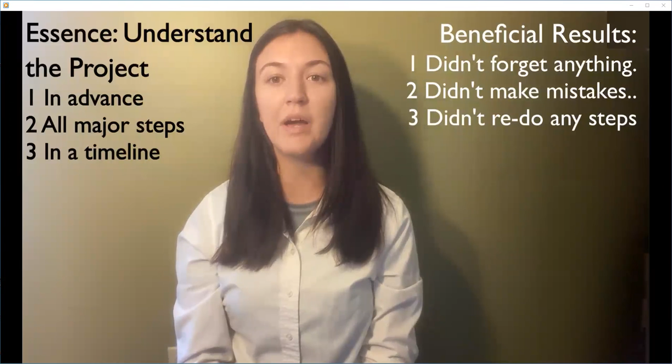The essence of project management is to clearly identify all that is required in the finished machine casting, understand it, and put all the major steps in a timeline. The idea is to think of everything that matters in advance and not forget anything. The objective is to not back up to fix mistakes or redo steps. For complex, high-specification DLA legacy castings, not fixing mistakes and not backing up to redo steps is a tough challenge.

Now, in this part 4, we will address the project management forethought required to finish the as-cast surfaces of a DLA legacy casting made in either the air-set sand or investment casting processes. Finish those as-cast surfaces so that the dimensional capability is protected, surface finish is protected, and solidification integrity is assured.

Now, notice that I emphasized the finishing of as-cast surfaces. It is one thing to form functionally, structurally, and dimensionally capable as-cast surfaces in the molding and pouring shop, but it is another to protect and sustain those as-cast surfaces in the finishing department. It is from those as-cast surfaces that the finished machine surfaces are formed in the correct positions and planes to meet the machined tolerance requirements.

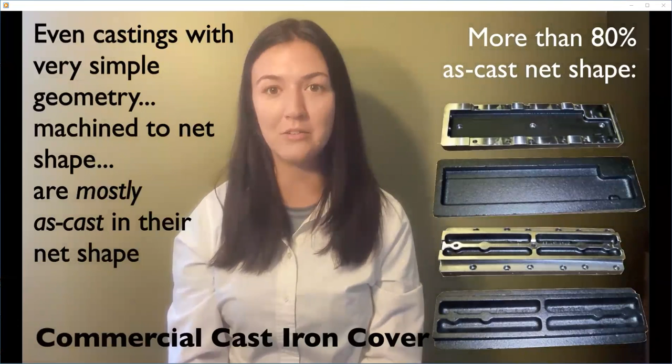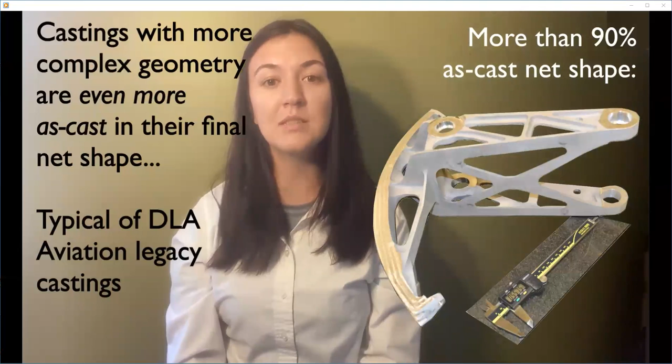The significance of as-cast surfaces can be put in perspective with these underappreciated insights about finished machined castings. Castings with very simple as-cast geometry machined to more complex net shape are still 80% or more as-cast in their final net shape. Castings with more complex as-cast geometry, as are typical DLA legacy castings, are 90%, 95%, and sometimes even more as-cast in their final net shape.

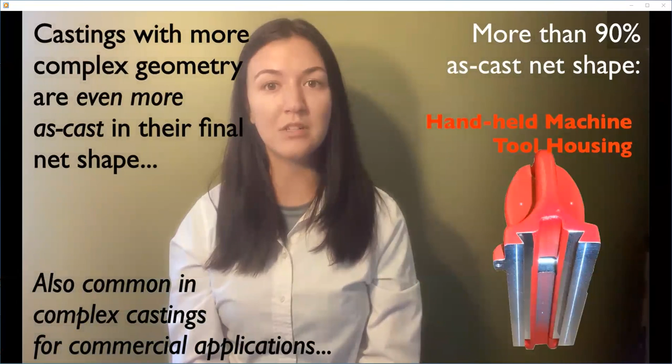Those high percentages of as-cast geometry mean that the as-cast features are important in the casting designs functionally, structurally, for stress control and component durability, and sometimes assembly with other components, using just the as-cast surface or surfaces. A common example of the latter is as-cast fastener holes and smooth, acceptably flat as-cast bolt-up surfaces.

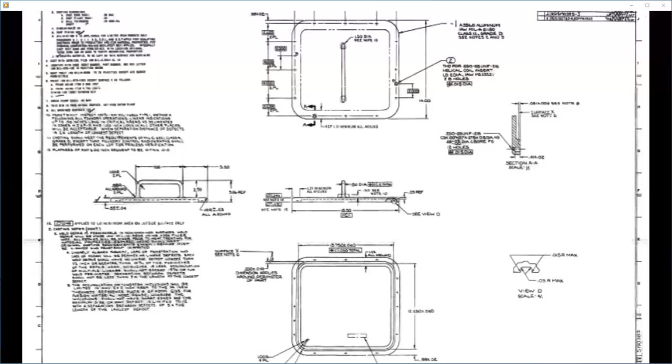Especially important to machine shops are the as-cast surfaces that are used for setup in the first machining fixture, and sometimes part of the setup targets for a second machining fixture. Those as-cast setup features should be datums in the design of the casting, and those features should have datum targets defined on them. For legacy casting 2D drawings, those datum targets are probably not defined, and the metal caster and machine shop must define those targets in advance before anything starts.

Foremost, this part 4 summarizes why, how, and when as-cast surfaces should be protected in their original dimensional capability from the design of the mold cavity and its processes, and their conformance to the drawing's dimensional specifications.

While protection of as-cast dimensional capability and conformance with tolerances is paramount, the next most important function of casting finishing is verifying, and sometimes upgrading by in-process weld rework, solidification integrity. Solidification integrity in castings is the basis of mechanical properties and casting durability in cyclic life.

Fundamental to achieving mechanical properties in heat-treatable alloys is the equipment and process controls for controlled heating, controlled time at temperature, and controlled cooling of the casting to accomplish the specified mechanical properties. Whether heat-treated in-house or by an outside heat-treating partner, it is a process that is well understood and robust.

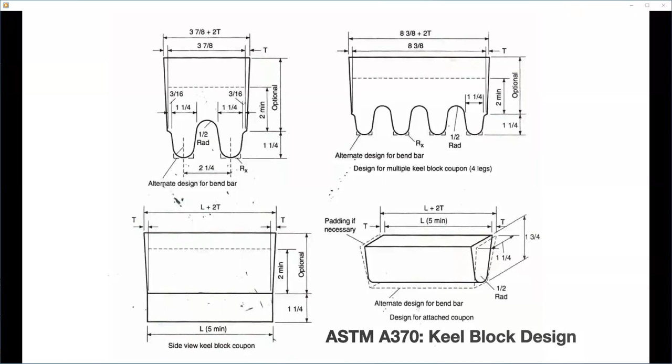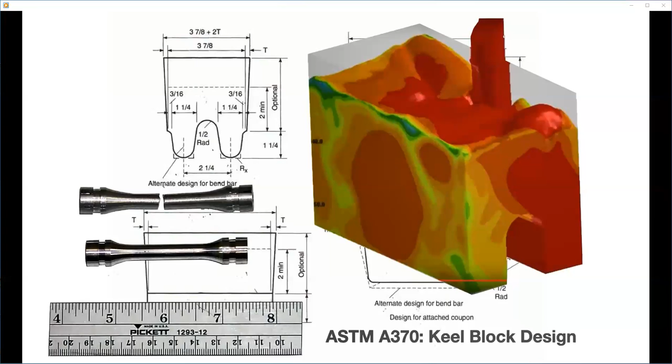Since verification of heat-treated properties is usually accomplished with test coupons that are as-cast separately by one method or another, the properties from tensile tests, impact tests, and bend tests, for example, are representative of the alloy's capability, not necessarily a local high-stress region in the actual castings.

In this Part 4 overview of project management of casting finishing processes, we address testing for solidification integrity of high specification castings, both on their surface and in their interior. If a local region of a casting is critical structurally, the design will include specifications for non-destructive testing by surface methods and/or radiography. If the solidification integrity meets those NDT specifications, then the results of heat treatment and mechanical testing of coupons will assure the casting has the strength and durability intended in its design.

Today's concluding episode explains all this thoughtful project management thinking at the outset, before any finishing processes just start. To characterize the finishing of as-cast surfaces in either the air-set sand or investment casting processes will be our Cast It teammate Mike Gwynn. Mike is our expert on casting design and manufacturing engineering, with a background in manufacturing operations management, which includes project management.

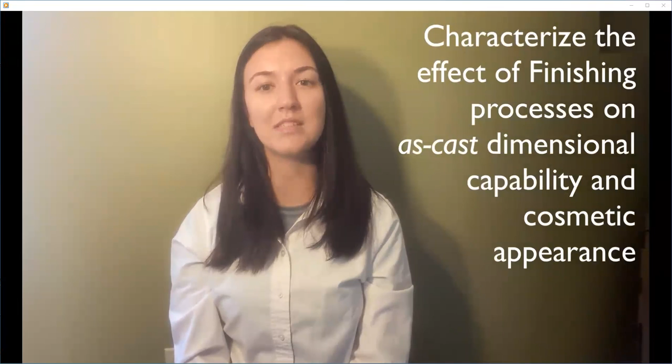We suspect that project management forethought of the finishing of as-cast surfaces, even before mold cavity tooling is designed and built, even before manufacturing engineering of the mold making process, is a fresh idea. After Mike's focus on the forethought required to assure the finishing processes protect the casting's as-cast dimensional capability, I'll return to address the roles that finishing plays in assuring the casting meets its solidification integrity requirements. Now, here's Mike to characterize the effect of finishing processes on dimensional capability and cosmetic appearance of as-cast surfaces, and how to use care in those processes to protect them.

Thanks, Julia, for that insightful first segment on the finishing of castings in general, and specifically the finishing of castings made in the air-set sand and investment casting processes. Building on the whys of casting finishing that Julia introduced, let's now address when the protection of as-cast surfaces begins and then how to do so.

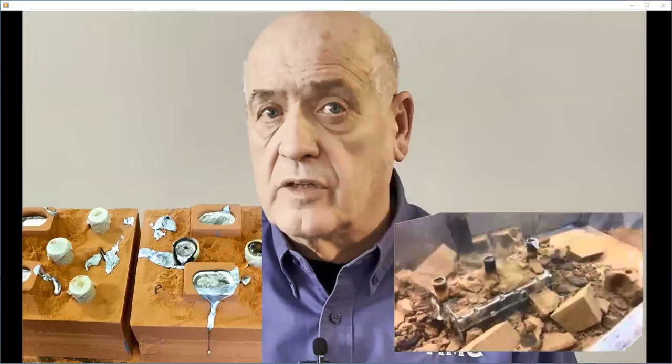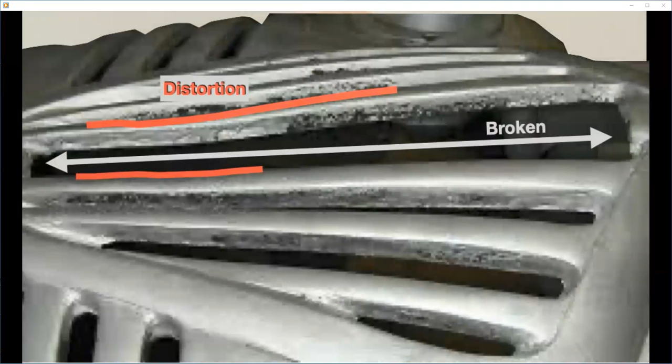Perhaps surprisingly, finishing begins when the casting is still in the mold cooling. At this point, the foundry and pouring teams are less interested in the casting and more interested in moving the molds to shakeout in the case of air-set sand castings, or to ceramic shell removal in the case of investment castings. However, removing the casting from its mold too quickly risks distortion of the thin walls and delicate projected casting features. Such distortion will immediately violate as-cast dimensional tolerances, and the idea of protecting the as-cast surfaces has already been compromised. The consequence of accidental casting distortion from removing the casting from the mold too soon, while it's too hot and too soft, depends on the alloy.

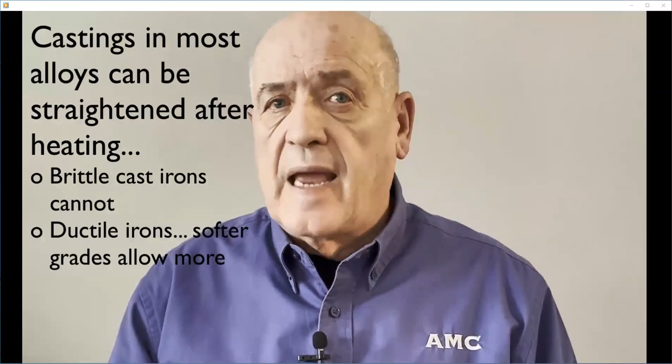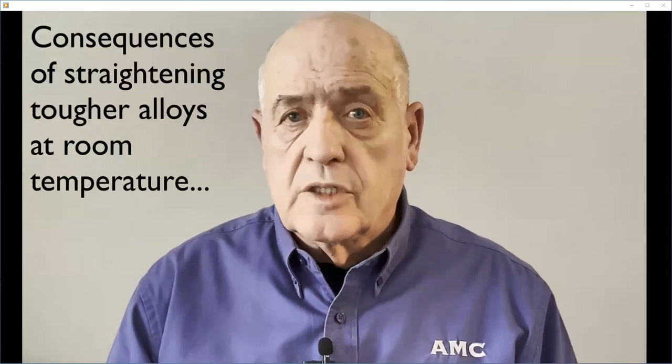Most casting alloys can be straightened, although brittle cast irons cannot, even if heated to high temperature. Ductile irons can be straightened in varying degrees depending on the strength grade; softer grades can be straightened more than harder ones. Some alloys, especially steels, can be straightened at room temperature without causing a crack. However, doing so means the metal is being plastically deformed in local spots to enable movement of an entire bent or twisted feature. Plastic deformation shortens the cyclic life of a metal component.

Perhaps the casting only has a static structural purpose, or no structural purpose at all, but the finishing folks probably have no idea about any of that. It's proper practice to heat the casting to an appropriate temperature, depending on the alloy, to prevent plastic deformation while straightening. That way the casting's structural life, if that's important, won't be compromised.

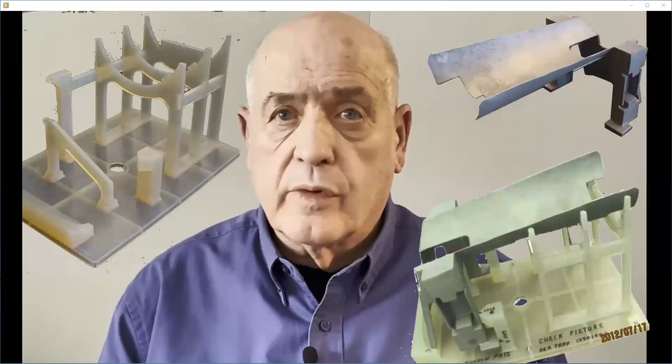Here we see a high specification, very complex, high alloy steel casting being checked for straightness in a quick 3D printed, durable nylon dimensional checking fixture. Usually castings are straightened by a skilled operator with a press, a torch, and manual straightening blocks of various shapes. The checking fixture is used over and over to verify the progress of the straightening increments.

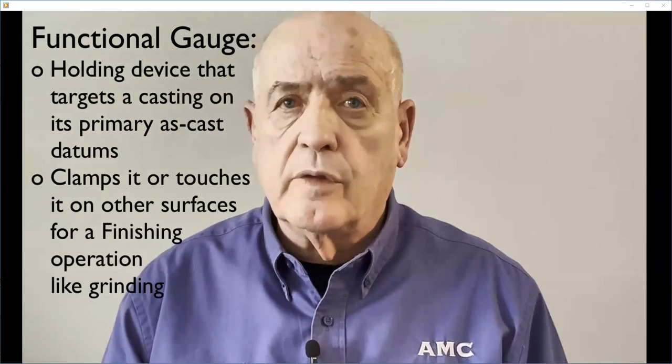A very effective tool for protecting the as-cast features most important for casting machining setup and as-cast features used in final assembly is a functional gauge. A functional gauge is a finishing process holding device that targets a casting on its primary datums and clamps or touches it on other surfaces important to the first machining fixture and/or as-cast final assembly features.

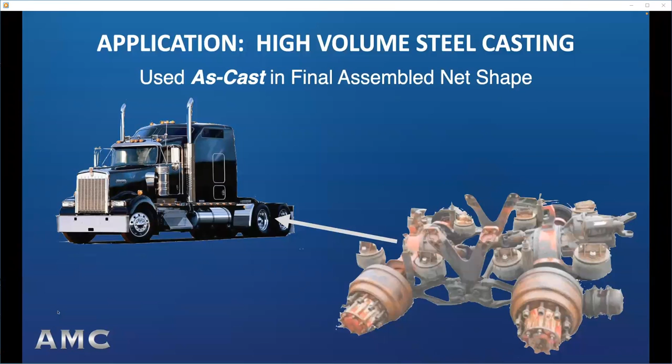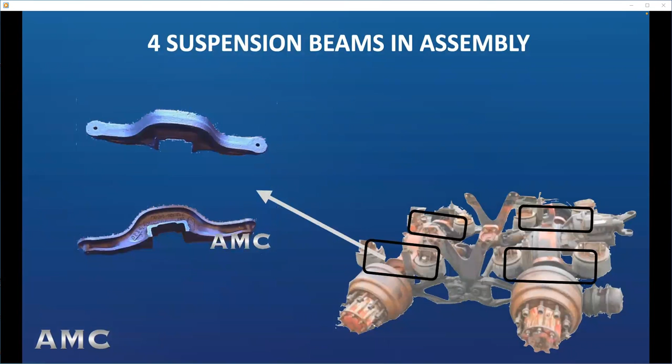Every casting passes through the functional gauge in its finishing process step; therefore, it's 100% dimensionally verified. Here's an example of 3 functional gauges used in assuring dimensional compliance of a steel casting used in the rear suspension of an 18-wheeler tractor. The casting is used as cast, with no machined surfaces, in its final assembled net shape. Shown are 2 views of the green sand casting, 4 of which are used in the suspension supporting airbags. Accurately placed and accurate cores form the assembly surfaces in the suspension.

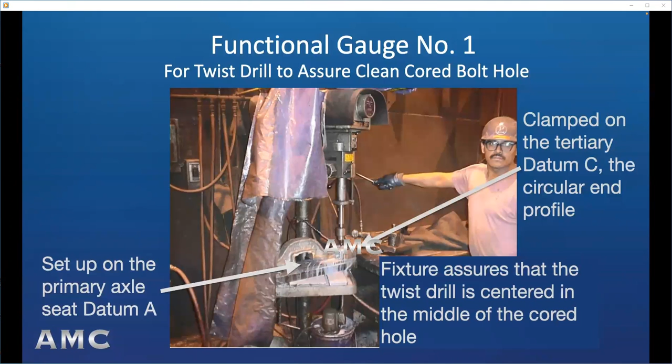This is the first of 3 functional gauges. This one sets up the casting on the primary datum A, which is the axle seat. The casting is clamped against the tertiary datum C, which is the circular profile of the airbag seat. The functional purpose of the fixture is to assure that a twist drill passing through the cored as-cast bolt hole is centered, only assuring there is no plus metal on the inside of the cored hole, but not actually drilling an elongated shape in the hole.

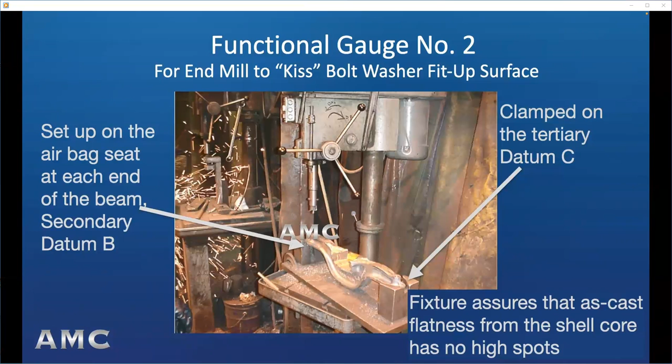The casting rests upside down on the second functional gauge, set up on the secondary datum B, the face of the airbag seat on each end of the casting. A simple piloted end mill kisses the face of the surface on which the airbag's bolt washer sits.

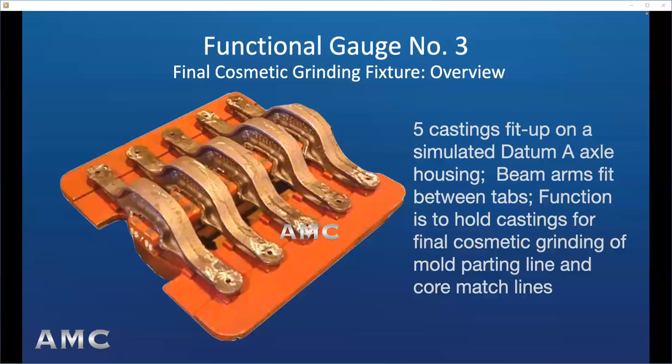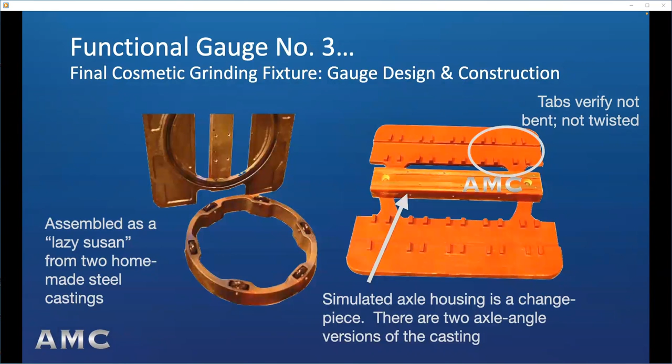Five castings fit up on a simulated datum A axle housing. The beam's arm fits between rectangular tabs. The function is to hold the beams for final cosmetic grinding of the mold parting line and core match lines. Design and construction of the functional gauge are two homemade steel castings, enabling the castings to be spun around on a Lazy Susan. The rectangular tabs assure that each casting is not bent or twisted. A steel-stripped wooden change piece simulates the axle housing.

60,000 castings in the two axle angle versions were shipped each year, assembled on trucks completely as-cast, no machining, and virtually zero casting complaints or returns.

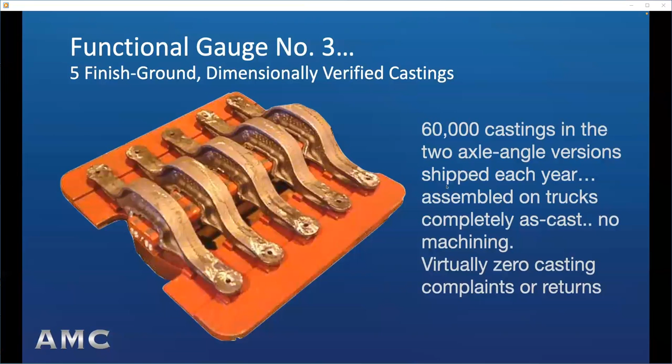Now let's address how finishing is done for complex high specification castings to protect their as-cast surfaces. The first finishing process is to remove the gating system, the risers, and the vents, which are additions to the casting's design geometry to fill the mold, feed solidification shrinkage, and remove gases in front of the liquid metal as it flows into the mold. For short, we call those geometries plus metal chills in the mold walls of sand castings process interface geometry.

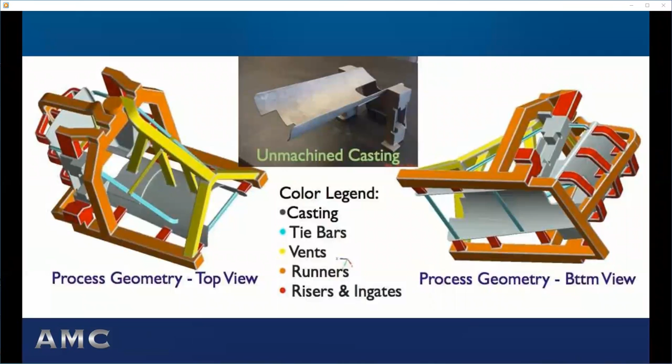The first realization about process interface geometry is that its connections are not as-cast. The markers from those connections are manufactured by finishing operators using various means of cutoff and blending. The intent of blending is to make the markers look as much like the surrounding as-cast mold surfaces as required by the casting's dimensional and surface finish specifications.

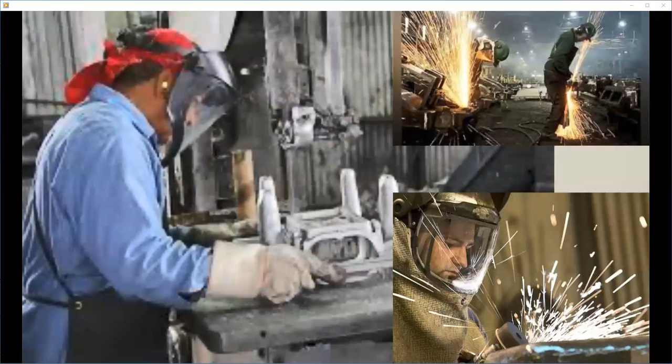But the marker surfaces don't have the dimensional tolerance capability of the surrounding as-cast mold surfaces. And why is that? Well, because a person formed them with a blending tool by hand and by visual appearance as the blending progresses. It doesn't make a difference whether the casting was made in air-set sand or in the investment casting process. The marker is always formed by a person using hand tools and eye-hand coordination.

Amazingly, most first article inspectors have no idea of the extent or history of these markers on some surfaces of every casting they inspect. I know I'm exaggerating, being cynical and sarcastic, but metal casters, like I have been, who suffer through first article inspections and meaningless nonconformances, will smile as I say this.

First article inspectors encountering a casting are amazed again and again by the presence of draft, let alone the presence of process interface geometry markers. It's like each casting is a fresh encounter.

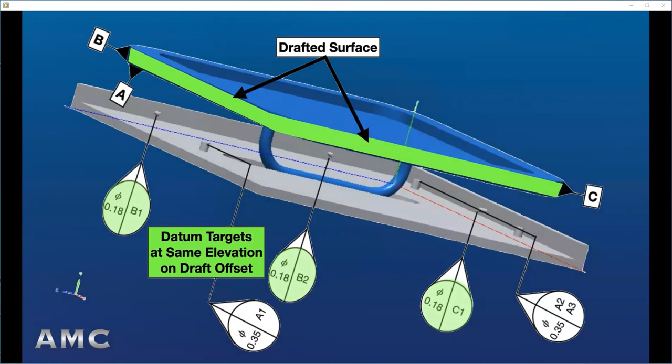And while I'm insulting people, let me also say with tongue in cheek that machine shops who don't regularly machine castings unknowingly build machining fixtures that target drafted surfaces at different draft offset elevations, and then target process interface geometry markers. Then they complain that the castings are defective and won't machine consistently into dimensionally acceptable parts.

Well, what to do about this disconnect is a subject that I address in my work with casting design engineers, but it's beyond our purpose in this webinar.

What is our purpose is to address reality for high specification, complex geometry castings, specifically DLA legacy castings. That reality: finishing of these process interface geometry markers has to be essentially perfect within the specified as-cast dimensional tolerance profiles and surface finish.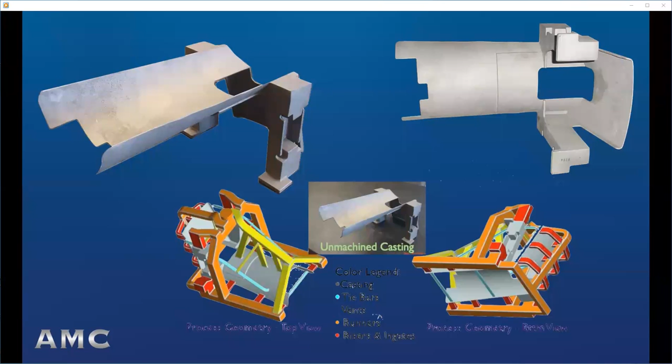It's a lot of work and tender loving care to make these markers essentially perfect within specification, but first article inspectors will not realize the reason for their presence and will not have the original engineering authority available to say, oh yes, those markers need to be there, those are okay in those positions.

Well, back in the day, with the original design authority and the original supply chain, those informal deviations actually happened. Now, in a cold start, it won't happen.

Before moving on to the finishing processes that assure specified solidification integrity, let's define the difference between the fourth kind of process interface geometry and the other three.

That fourth kind is markers from the placement of metal chills in the mold walls of sand castings. High specification air-set sand castings in aluminum, magnesium, and lightweight steel castings especially use chills to accomplish the specified solidification integrity and the resulting mechanical properties.

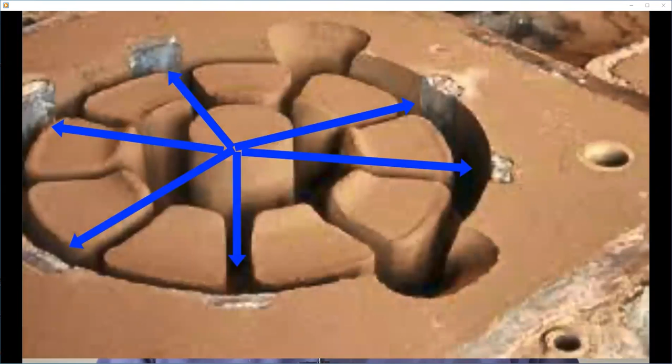Because investment castings are poured in a preheated, very hot ceramic shell mold, chills are not involved in setting up solidification integrity.

But chills are very common in high specification air-set sand molds. The blending of chill marks is different than the blending of other process interface geometry markers. First, there's no cutting off of attached geometry.

Depending on the fluid life of the alloy, the chill mark may have a thin raised fin of metal defining the edges of the chill as it was set in the sand mold wall. That thin fin needs to be ground flush with the surrounding as-cast sand mold profile.

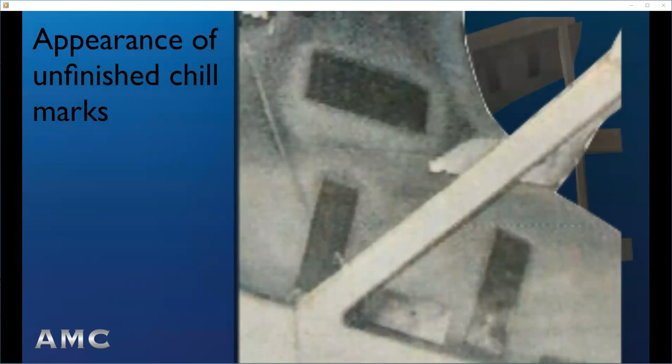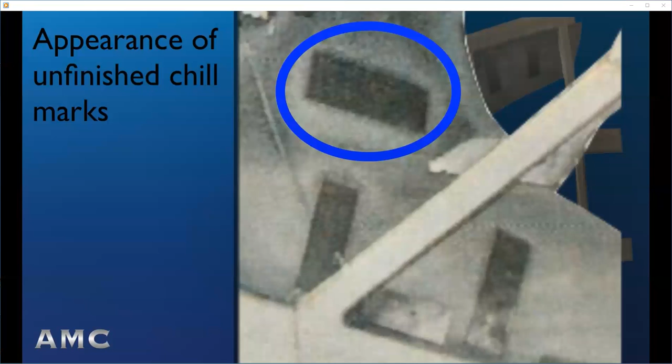The chill face itself, being metal, will have a different texture than the surrounding as-cast sand mold texture. Some of that difference can be minimized by media blasting the chill face to make it appear rougher.

So what is the thoughtful, advanced project management planning that can address all of these process interface geometry marker appearance and dimensional problems? Well, first, assuring that the upgrading of some as-cast surfaces to finished machine surfaces will be dimensionally conforming and consistent from casting to casting based on machining fixture design that avoids the markers.

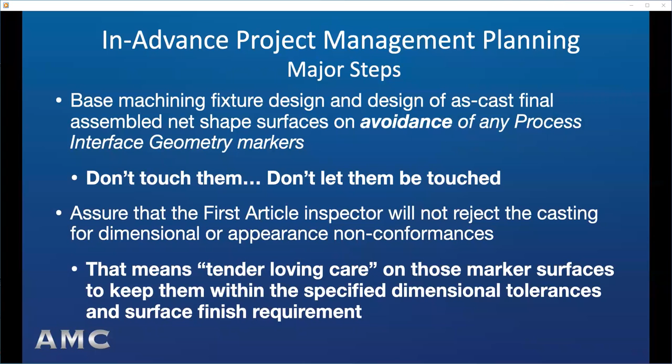And second, assuring that the first article inspector, who is probably completely or mostly unaware of the presence and reasons for these markers, will not reject the casting for dimensional or appearance nonconformances. That means doing so essentially perfectly within the dimensional tolerance and surface finish specifications of the surrounding as-cast surfaces.

Well, let's now return to Julia, who will put a cap on the project management finishing principles for protecting the dimensional capability of as-cast surfaces. And then Julia will address the roles that finishing plays in assuring that a high specification casting conforms to its solidification integrity requirements.

To finish Mike's segment on protecting as-cast surfaces in finishing processes, let's look at simpler but still threatening finishing practices to as-cast dimensions and surfaces. First, handling among smaller, lighter castings of all kinds.

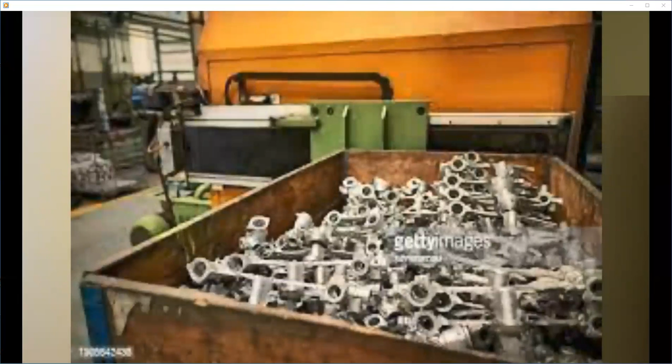Finishing operators have scores, even hundreds of small castings to move during the course of a single day. The castings have to move from one finishing processing step to another. For the sake of production efficiency, operators have to move the small castings from their workstation to a nearby box for a fork truck to move to the next finishing operation.

In the case of light alloy castings, it is typical to toss a process casting into a nearby box. Likewise, brittle cast iron castings are typically tossed only a short distance to prevent fracture. Copper-based castings are typically softer than cast iron, but heavy, so a short toss can result in a dent.

Ductile iron and steel castings are both heavy and dent resistant, and they are not only tossed, but thrown longer distances. If features are thin and projected, the long throw and abrupt stop can dent a ductile iron casting and dent or bend a steel casting.

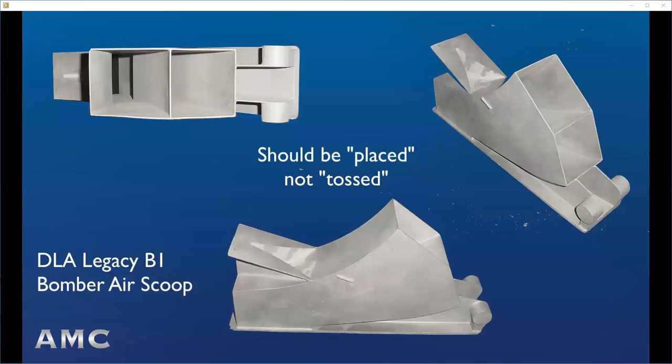The typical DLA legacy casting, especially airframe castings in aluminum, magnesium, and thin wall steels, need to be set up in the finishing process plans for placing, not tossing, as finishing processes are completed.

It is also common to move high specification castings from one business partner location to another by truck. For example, from intermediate as-cast finishing steps at the casting facility to a local heat treat shop, or from the final as-cast finishing processes to a local coater or plater.

For castings with thin wall projected features, it is important to package them with separators for the transit back and forth to avoid dings and distortion.

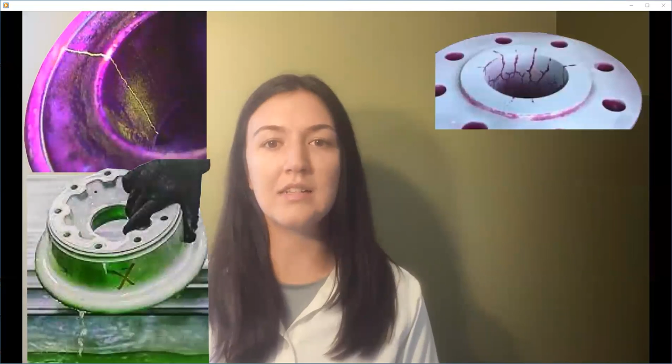Non-destructive testing is used to assure solidification integrity on casting surfaces: freedom from cracks or hot tears tested by magnetic particle or dye penetrant inspection, or casting internal integrity, which is specified levels of acceptable internal porosity tested by radiography.

In-process weld rework is used to repair surface or internal integrity anomalies. As always, a repaired surface must include blending of the repair to assure compliance with dimensional tolerances and surface finish in that region of the casting.

For castings requiring specialized coatings, when high specification coatings, anodizing, or plating have been completed, there is no backing up to repair a visual surface defect. So be sure to have completed all heat treating, non-destructive testing, and made any necessary surface repairs before sending the castings for coating and plating.

Not thinking through and making a project management plan for these handling, packaging, and coating processes is a common reason for backing up, remaking castings, and suffering big delays and big cost overruns.

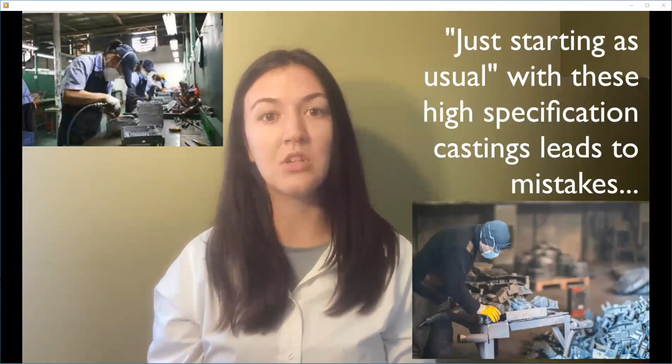Because of the cold start problem, DLA legacy castings have to be essentially perfect within specifications dimensionally and cosmetically. The risk and cost of first article rejection is just too great. Just starting as usual will result in finishing operators doing what they regularly do, and as usual is normally okay, but in these high specification situations, doing the usual leads to mistakes. These simpler finishing concerns and the more complex ones that Mike defined for us are the kinds of mistakes that our case study in Part 3 detailed.

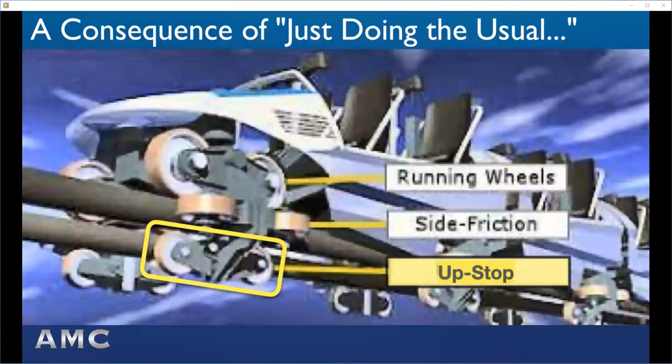10 commercial legacy and safety critical replacement part castings for a roller coaster ride took 4 years and 10 months to complete. At worst, even as difficult as the castings are to produce, finish, and machine, a few months should have been plenty of time.

Moving on now from protecting as-cast surfaces, let's look at how finishing processes affect solidification integrity. There are 3 finishing scenarios for a high specification casting, requiring verification of specified surface and/or internal integrity. First, no finishing processes are required—only non-destructive testing verification that the casting's design geometry and the metal caster's process interface geometry, that is the gating, risering, venting, and chilling, accomplished the required solidification integrity as the liquid alloy cooled in the mold. This is the best and technically achievable result of careful manufacturing engineering of the tooling design, the mold cavity making process design, and the setup of favorable temperature and mass gradients from the process interface geometry system.

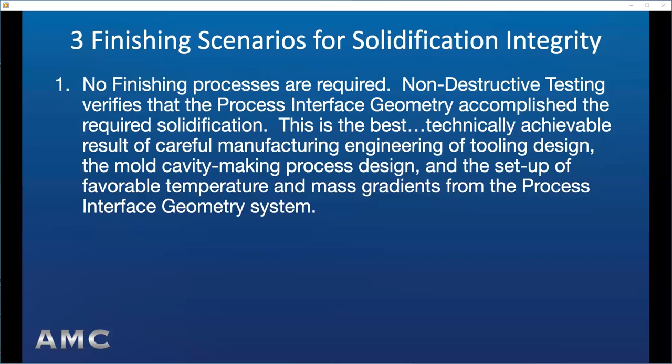Second, finishing processes are required to repair cracks in stress concentration regions in the casting geometry from improper straightening or from a rapid cooling quench after a high temperature heat treatment. The in-process weld rework process that Mike described in his segment is readily capable of restoring the casting to its specified surface integrity. To do so with certainty requires a preliminary stress relieving heat treatment to remove any remaining stress concentration that could hinder the weldability of the crack region.

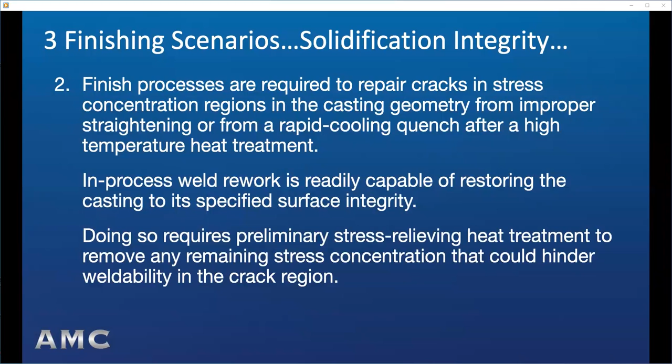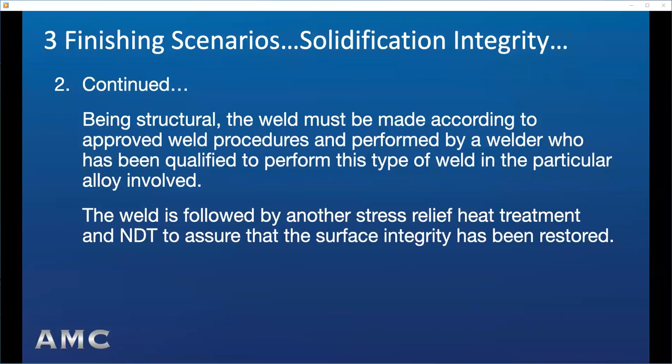Being structural, the weld must be made according to approved weld procedures and performed by a welder who has been qualified to perform this type of weld in the particular alloy involved. The weld is followed by another stress relief heat treatment and dye penetrant or magnetic particle inspection, depending on the metal casting alloy, to assure that surface integrity has been restored. That approval by a qualified inspector is followed by careful surface blending processes Mike described to restore the dimensional tolerance and surface finish conformance.

Third, internal porosity beyond the specified integrity class limits is found by radiographic testing. Typically, such porosity is solidification shrinkage, gas macroporosity, or gas microporosity. Radiographic standards for the various casting alloy types are established for these types of porosity and the standard grade levels of severity for each type. Part of a critical service casting's design is to establish the class of acceptable internal porosity. The acceptable level is correlated to the level of transformed stress in the region of the casting and the cyclic life intended for that casting.

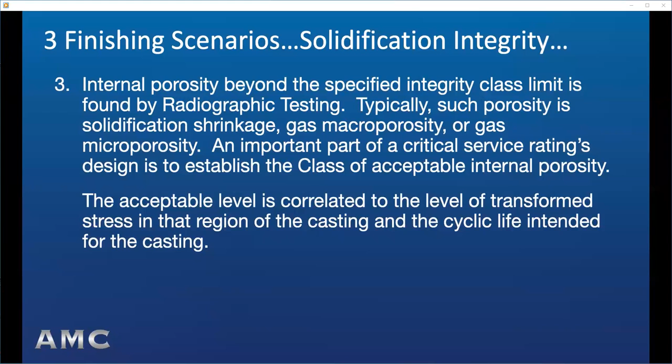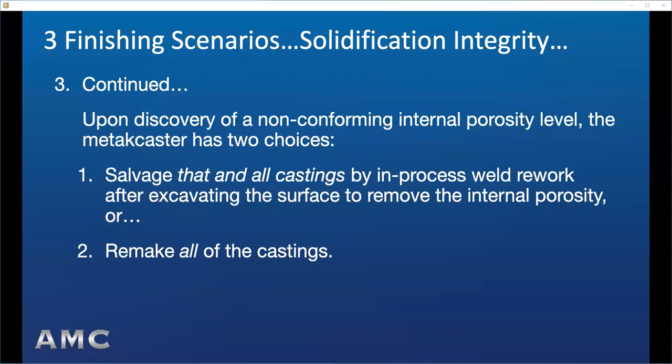Upon discovery of a non-conforming internal porosity level, the metal caster has two choices: salvage that and all castings by in-process weld rework after excavating the casting to remove the porosity, or remake all of the castings. That choice is typically made on the basis of cost and lead time. Since in-process weld rework has been established as capable and robust in restoring casting structural integrity, the choice revolves around the number of castings involved and the cost and lead time to remake them.

Internal porosity problems are almost always the result of casting design geometry and the manufacturing engineering techniques deployed in process interface geometry to assure that design solidification problems are overcome by gating, risering, and chilling strategies. That means that if one casting has the solidification integrity problem, then the others also have the problem or are on the cusp of having the problem, based on temperature gradient differences from one casting to another. If 5 castings are involved, salvage by in-process rework is the logical choice. If 50 castings are involved, then remaking all 50 may be the least costly and quickest solution.

Right here is the reason that in both the 2021 and 2022 webinar series focused on successful launches of DLA legacy castings, we implored making quick prototypes at the very outset. Those prototypes, quickly evaluated without much finishing, are so powerful in avoiding downstream, weeks-later problems with dimensions and solidification integrity.

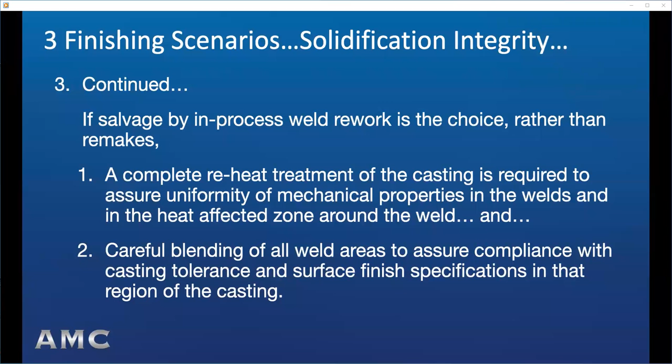To wrap up, since the two 2021 webinars and this 2022 webinar series are a continuum of how a cold start DLA legacy casting awardee can be successful in a very difficult casting launch, I will post in the chat box and in an email to each of you the links for each of the webinar episodes, including this one.